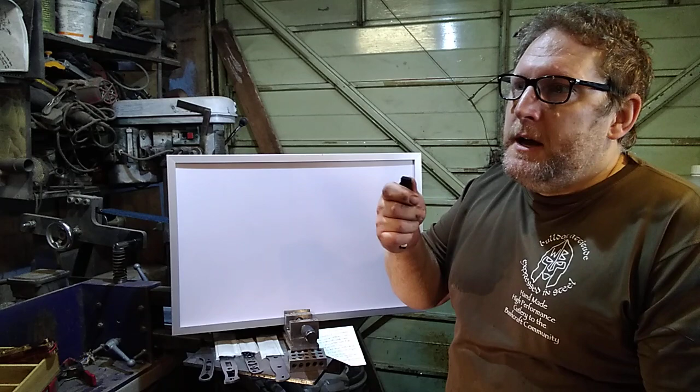So what I thought I'd do is address what the adversarial comments were with this one person, but also to share with you why I do one certain section of a knife making build the way I do it, okay, based on, I was in engineering-ish, and I was in manufacturing-ish, and I was in education-ish for about 25 years.

Nearly 50 now. So things I've picked up along the way. I'm not Isambard Kingdom Brunel, I'm not Dyson, I'm not Elon Musk, okay, but I've picked up things along the way and thought, I like that, I won't be doing it that way because that had problems, and gradually from talking to people and sharing, you end up with.

But what I don't do, if I can help it, is come up with some adversarial challenge in order to drag out of someone the holy grail of information that apparently I'm lacking in, which is what this comment was.

So the comments were, one person was, why do you drill so many holes? This is in the handle, drilling holes. I don't understand the chamfering. When it's covered with epoxy and scales, anyway, ABS

mastersmiths rarely, if ever, do any of these wacky things. Why drill all the holes? If the best knife makers do not do these things, why do you?

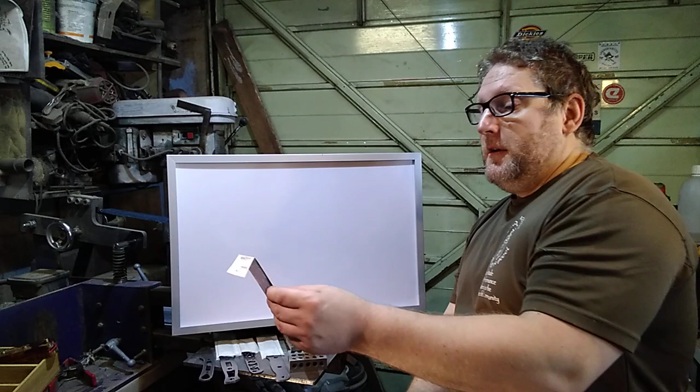This is what I know. So, why do you drill so many holes?

You could make a knife using only the holes that are meant for pins.

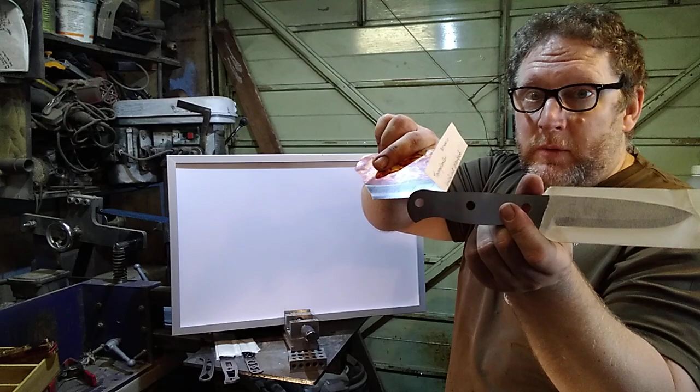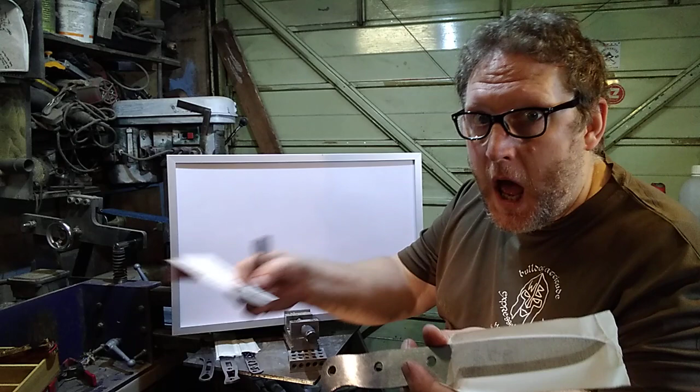So, being that there's stock removed on the blade, and being that there's probably more steel there because you haven't removed that area and you haven't removed all of that steel, you only took a few little scoops out there, plus added the weight of the pins, plus added the weight of the liners, plus added the weight of the scales, plus added the weight of the epoxy, okay, it could be handle heavy.

I'm 17.5 stone, probably wouldn't make much difference to me. I don't carve for hours on end, so it probably wouldn't make much difference to me. Having a blade-heavy handle with this model, and if you're going to baton it through wood anyway, it means you want it handle-down as you're taking it. There's so many reasons it doesn't make any difference.

My knife design for that one is like that. Why? Because it's simple. But why would you want to drill so many holes?

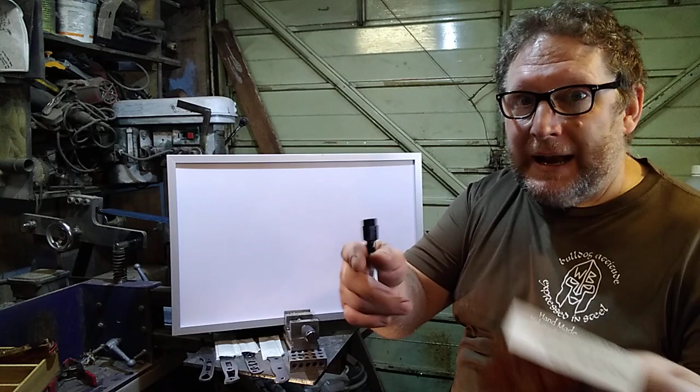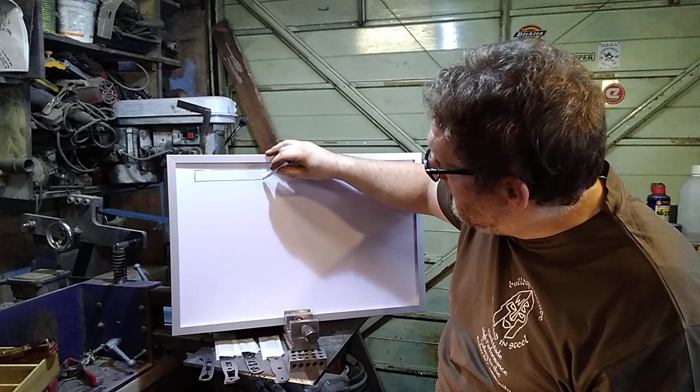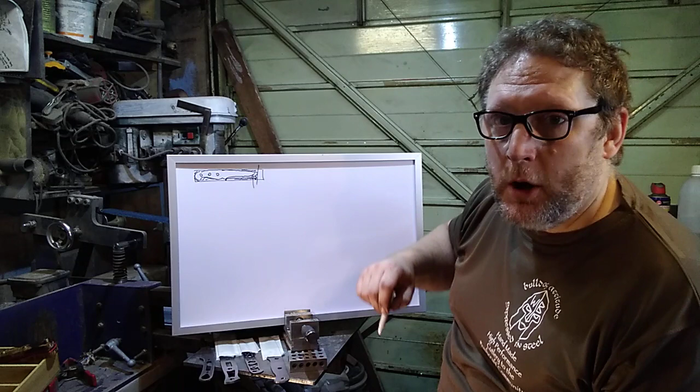So, balance. If you had a piece of steel like that, and you've made your Woodlore shape like that, and it gradually goes down to there, and your Woodlore comes up and does that as your Woodlore - okay, in terms of, you've took all of that steel out there, you've removed half of the steel on the bevel. By the time you've took all this out as well, and then done your 3 holes - oops, sorry - it's not a Woodlore clone, because a Woodlore clone does that.

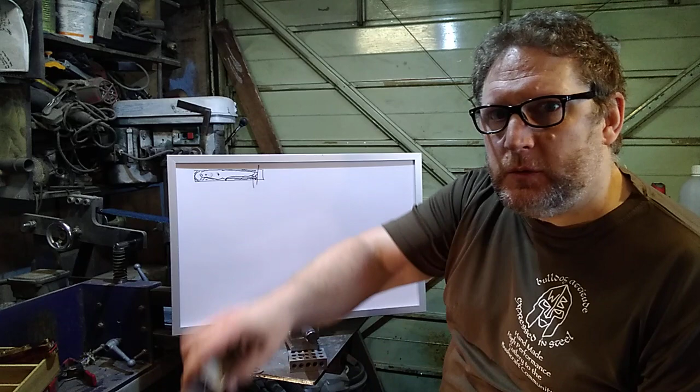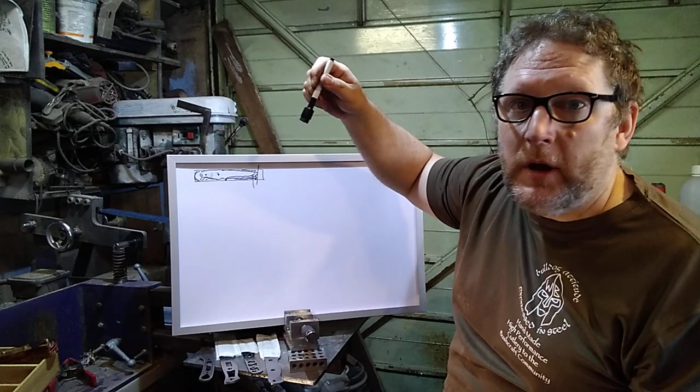See how my design is not a Woodlore already. My choice was to have them equidistant from scale at one end, center, pommel section. A Woodlore has a Corby pin there, ish, or a Loveless bolt at the other end, and then closer to the rear, a Loveless or Corby would be a lanyard tube. I don't make them like that. I've come away from that design. That's why I've done it the way I've done it.

So, why do you drill so many holes? Maybe that's the way he wants to do it. Balance, initially. So he's done all that, and then you add on the handle. There's a possibility that the handle could in fact shift the balance point to maybe there. So what could happen is they drill a hole there and a hole there, just to remove a little bit of steel, a little bit of weight, just to eke back the balance point and push it a little bit that way.

How about that? How about a knife maker made a choice to drill a few holes? Okay. Why additional holes? Why so many holes? If you had a handle - I'm looking at a plan view, okay?

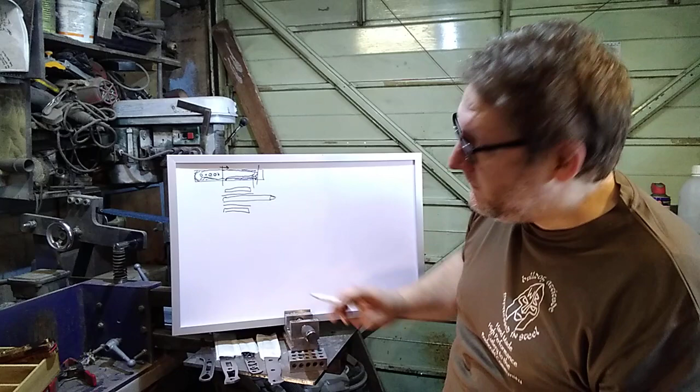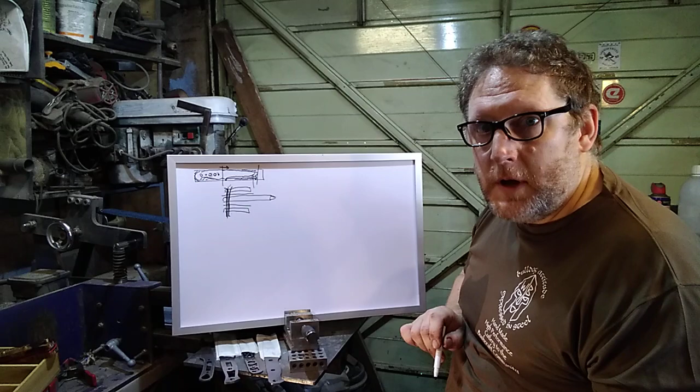There's the blade from above. You will put on a liner, scales, a liner, and scales. All that's connecting him to him is a pin or lanyard tube with the glue either side of the lanyard tube. If you had a hole here, the glue would also be from there down inside the hole and alongside underneath there, connecting this side through the handle, bracing and connecting that to the other side. It's called through-gluing.

There's 2 reasons. So I'm using the epoxy to actually connect one side to the other with more adhesion than solely the epoxy on the outside of a lanyard tube, a Loveless bolt, or a Corby, or a Loveless bolt and a Corby. So this is more connected to that. It's more together - there's glue all the way through.

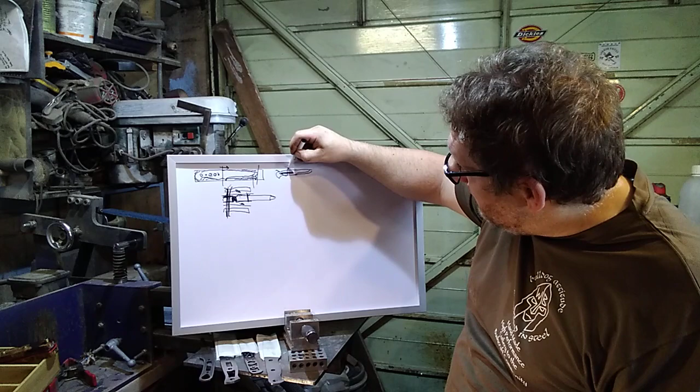The other thing you can do is on your handle - obviously I'm drawing this all backwards - there's your Woody McWoody. You can go on an idler wheel and you can scallop out a sort of half-moon section on both sides. Not much, just enough. And that allows the glue to join this hole to that hole, through that hole, through this to that hole, through that to that hole. It's even more connected, and you've got a well of glue that can go together when you squash it together with clamps. You're not squashing all the glue out - you're actually making use of the glue you've put in there, as opposed to getting it squeezed out. You're actually going to make use of it.

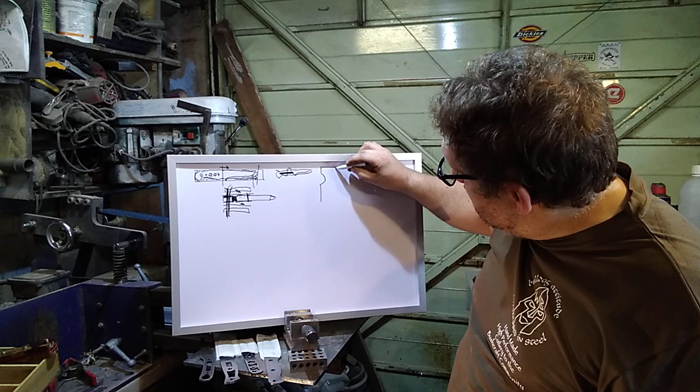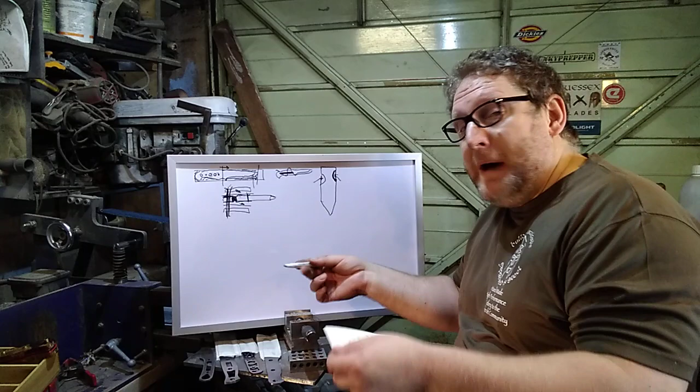And epoxy is generally lighter than steel, so you've reduced weight. So your section of your blade now looks like this, and you've gained the loss of weight. You've took out steel and you've put epoxy in the handle, so you get an aid in balance. So why do you drill so many holes? Balance, through-gluing. You could also do a fuller effect within the handle for more through-gluing. Okay.

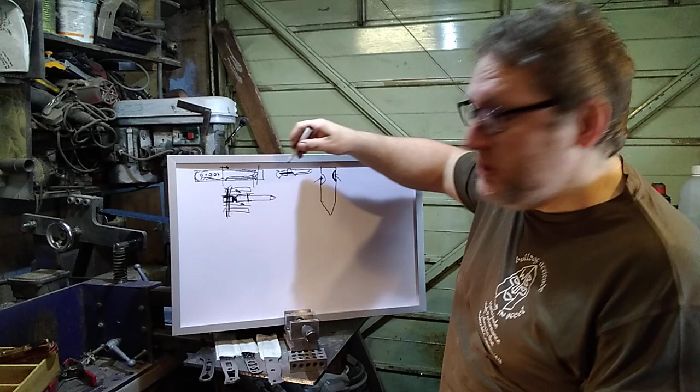Master bladesmiths rarely, if ever, do any of this whacking. Generally speaking, a lot of master bladesmiths do stick tangs for balance. They're that good, and I bow to their general superiority. A lot of the time their blades are that good. Okay, they'll make them like that, and they'll put one pin there - it won't be as big as that - they'll put one pin there.

If a master bladesmith wants to do that, he can carry on. I'm a knife maker, I don't deal in stick tangs. There's a lot of things where I'll use a full tang for strength, whereas a master bladesmith has got it way down. His removal of material for the handle, if he puts a guard on, a bolster, however he pins the end over, or whatever pommel he puts on, is going to be top quality. A master bladesmith could do that.

But if he's forging it, he's not going to forge a full tang and then grind that down, he's going to forge it like that. If you're going to do stock removal, you wouldn't stock remove that shape. You want to remove the least amount possible. Who stock removes a knife of that profile? If you're going to stock remove, you'll do something where you only remove a little bit at a time. We wouldn't generally make it like that in stock removal. That's a forging blade profile, because you're using as much steel as possible, getting as much blade as you can, while retaining a fair amount of steel within the handle for strength and rigidity.

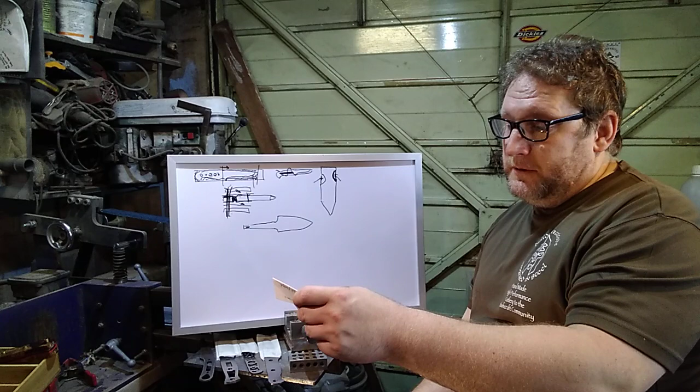What he's forgotten to ask is, you've drilled all the holes, right? And then why the chamfering? Well, first of all, he didn't ask, why didn't you ream it? So you drill a hole, okay, what you'll have is probably a slight amount of scoring in it. Now if you ream the hole out, you'll finish the hole ever so slightly better.

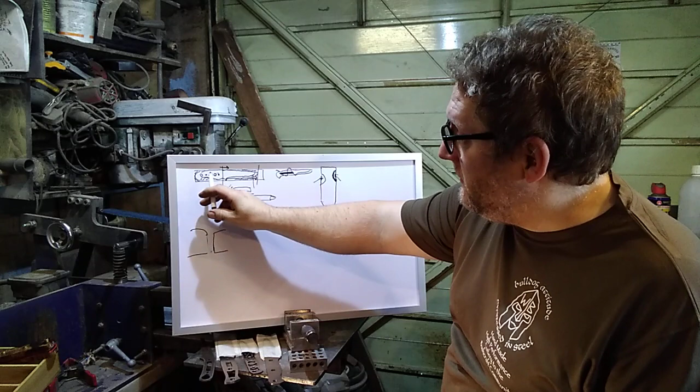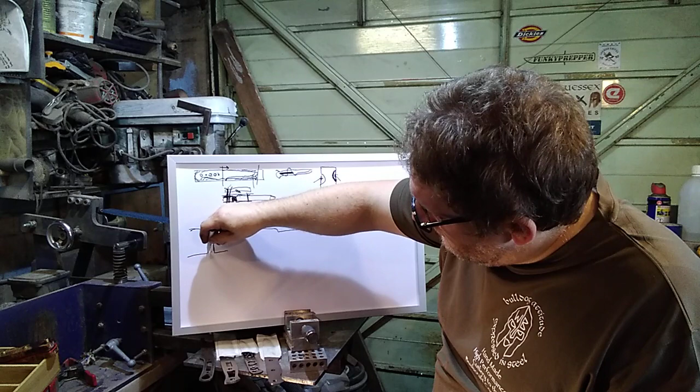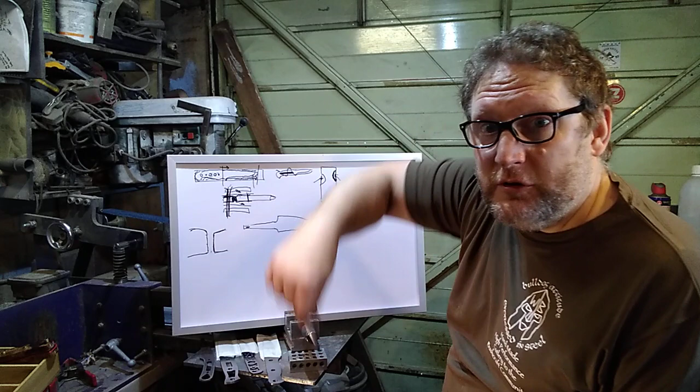What we're trying to get on our holes, blade edges, handle edges, is a smooth finish, devoid of pits, cracks, or sharp corners. So if you've drilled the hole really, really well, you're probably not going to have a reason to ream it. But if you've blasted through and your drill bit's a bit nasty, occasionally you'll get score marks in it. So to ream the hole, or just dress it out with a Dremel or something, just a little bit, will tidy up the hole away from what the drill bit's start at the beginning, and the flute as it's gone down through, doesn't always leave the most perfect finish.

It's not really the end of the world if you've done it, but what we're trying to do is get a job better than if we hadn't considered it - the balance, the weight, and all the rest of it. What we're talking about now is pits, scratches, or sharp corners. We don't want something called stress propagators - the chance of all the stresses and strains within a knife being used physically having somewhere to start at. It's called a riser, that's the word, a riser.

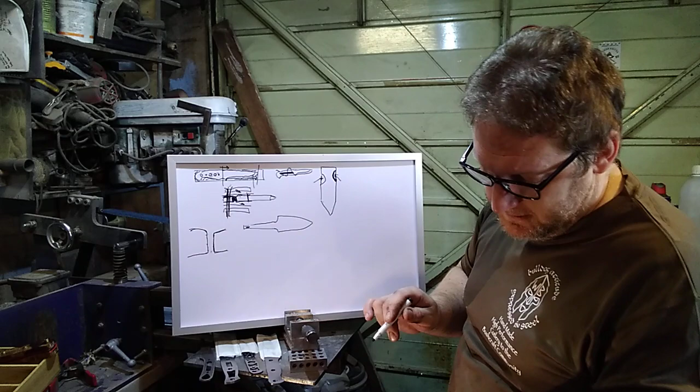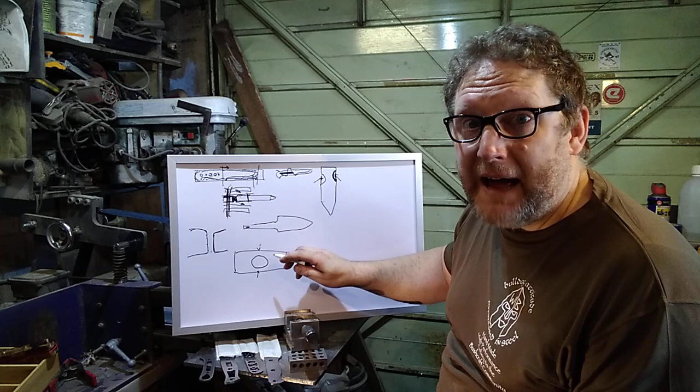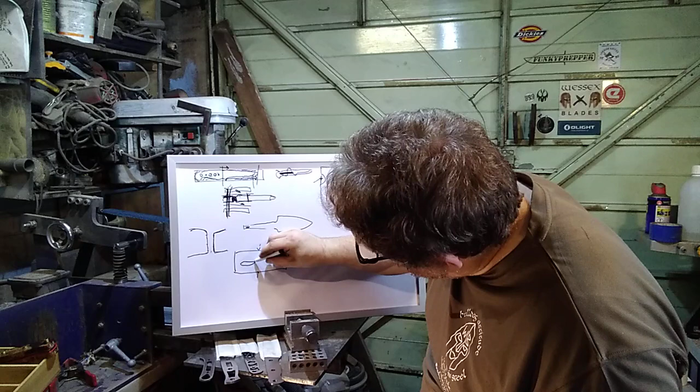So you've got a piece of steel like that. Now let's say it's going to be a pry bar and you're going to design it. You wouldn't put a thumping great hole in it like that, because you've got thinner sections there - does that make sense? A pry bar's use would be daft if you've got huge holes there. What would be better, for the same amount of steel lost, would be to add something more of an ellipse than a point. So you've still removed a fair amount of material, but you haven't got sharp corners.

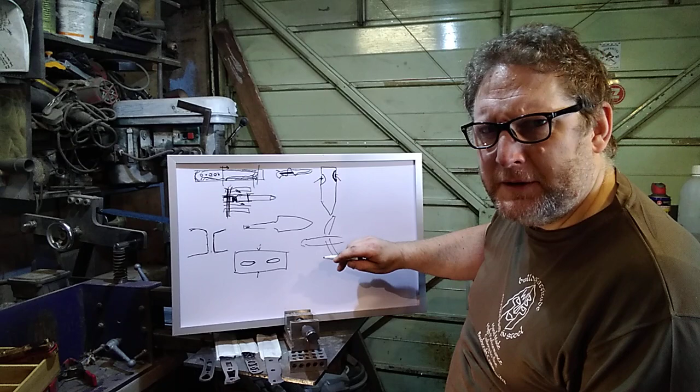There was an airplane that was made, called the de Havilland Comet. The design of the Comet looks very much like a normal sort of plane you get now - very much like most planes are made now.

Very, very similar. However, when you had a look at the windows, in 1949, the windows were really square. And with all the stresses and strains of flying aircraft, it turned out these corners weren't the best thing for it. So now you look at aircraft windows and they're more rounded.

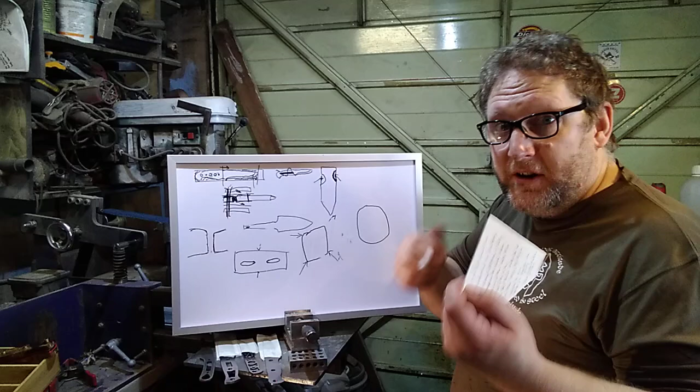Those theories, that idea, is what we're trying to get into knife making if we can consider it. So what we try to get away from is having a sharp corner - pits, chips, areas of cracks, anything like that. You can see how when I drew this one here, I've drawn a rounded section there. He hasn't made it like that - well, it's just, I like having it like that.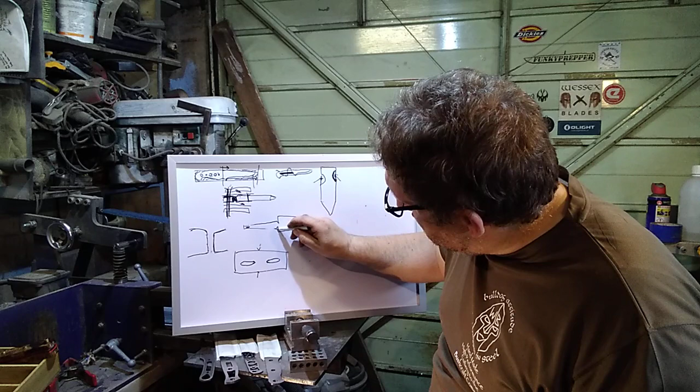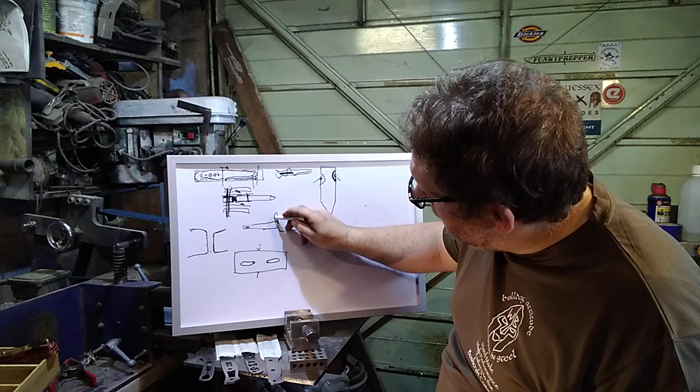I like having that area because when I glue my softwood guard on, I've got more area for the glue. It just wouldn't happen otherwise - softwood guard, cross grain, you know? It just wouldn't happen.

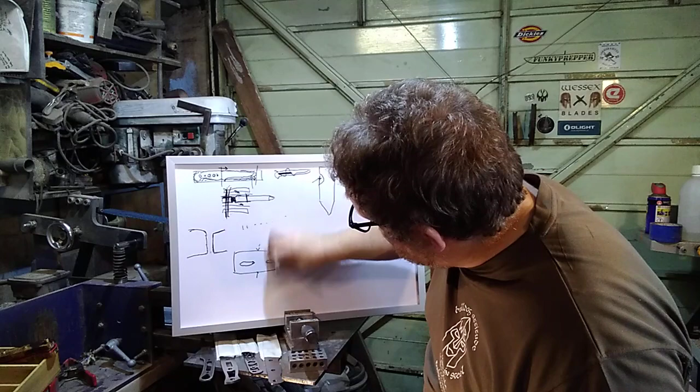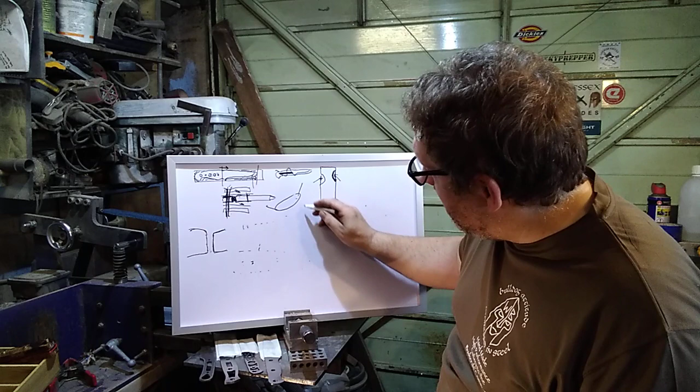So you do a hole, and if it had drill bit marks in it, you'd ream the drill bit marks out. Then, just in case you've got ever such a slight burr, you'd chamfer it. So your 45-degree tool will come in like that and just gently chamfer that off. Now you wouldn't chamfer it a ridiculous amount.

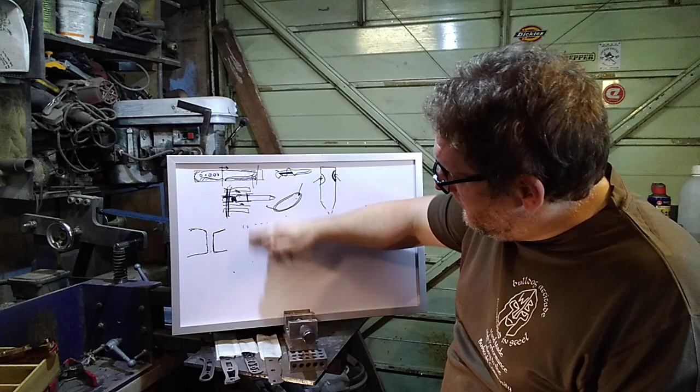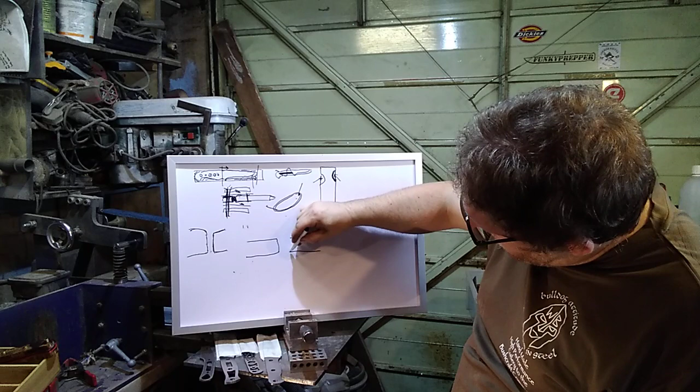So now we're looking at it side on - there's the steel. You would only chamfer just the littlest amount. You wouldn't chamfer it a large amount because you want the rigidity for the pin to go through, so that all this contact area here would stop the pin from moving. That makes sense - so you would chamfer it only a little.

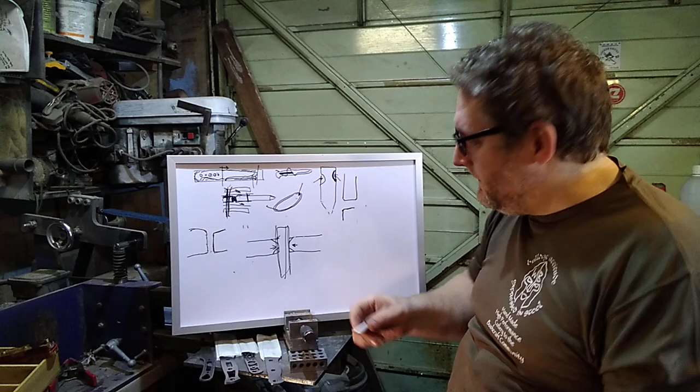So why the chamfering? It just takes that nasty sharp corner off just ever so slightly, and that'll aid initially the pin. I actually chamfer the ends of my pins as well, so when you're gluing, the pin can rattle into the hole a lot happier. Plus you don't pump all the glue out of the hole because you've got a really square faced pin and a really square faced hole. By chamfering the hole and the pin, there's more chance that less glue comes out when you push the pins in from either direction. Does that make sense? Why chamfer? Takes the corners off, less glue push out.

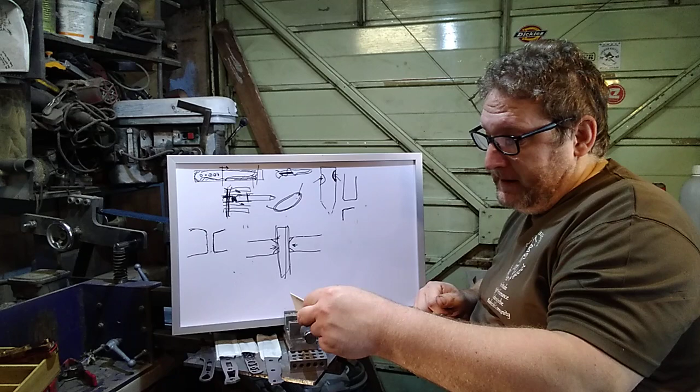Happy days, you could have googled all of this. And where's the last one? Why drill all the holes? The volume of holes is basically for balance, but you don't necessarily need to drill holes.

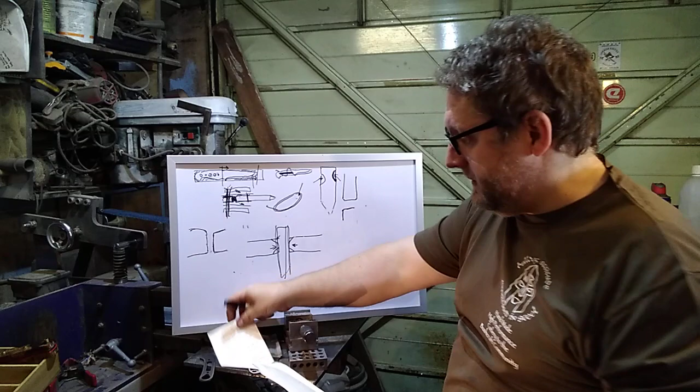My blades are lasered out, and then what I have to do after it's lasered is Dremel all the way through here so that the start point of the laser's initial blast, when it comes round and meets up with it, you end up with a little spike. I don't want that spike there, so I've Dremeled it all off neat and tidy. Plus, from the heat treat, I've took all the decarburized areas off, so all of that is Dremeled - it's all shiny inside and rounded corners, so I ain't got any starts.

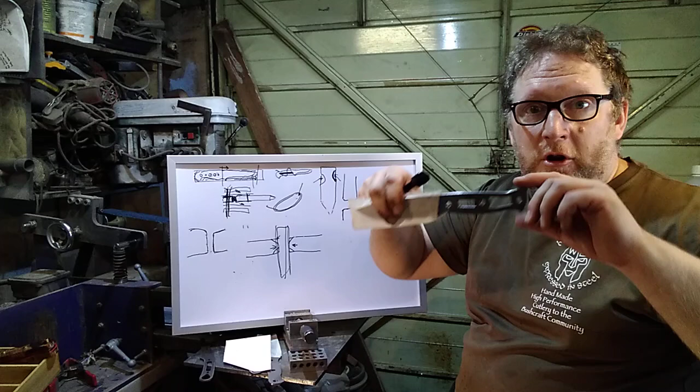And then what I'll do is just before I'm doing the gluing, I'll go onto the top roller and I'll just gently do this fuller's way sort of section across there just to connect everything up together again.

So why did I take all that out here again? Balance. I've took weight out, but I haven't given myself square edges - I've not cut squares out, I've cut rounded things off, and even then I'll skim around the inside of the thing anyway with a Dremel, just taking any sharp edges or nicks or burrs or whatever, sorting it all out there.

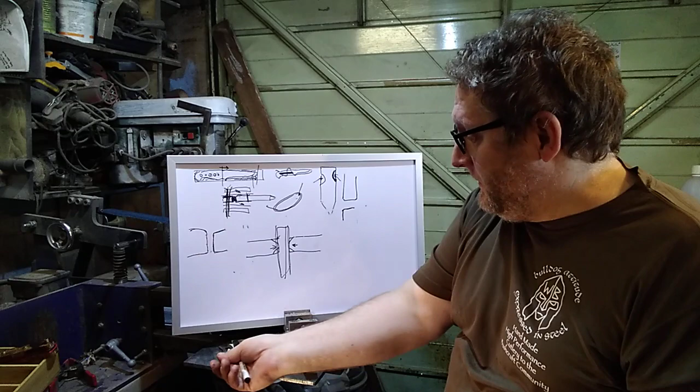It's good fun, isn't it? Anyway, one little thing about general knife making and making loads of holes.

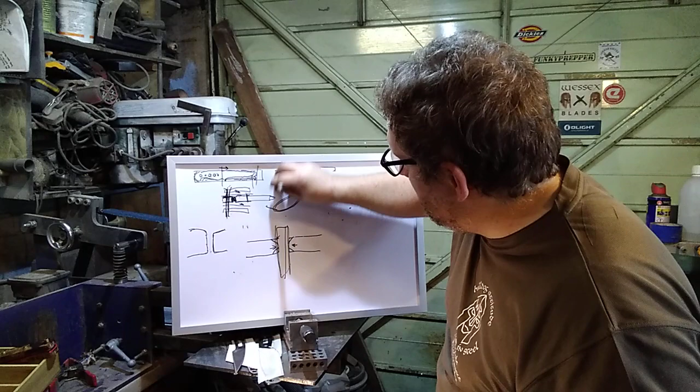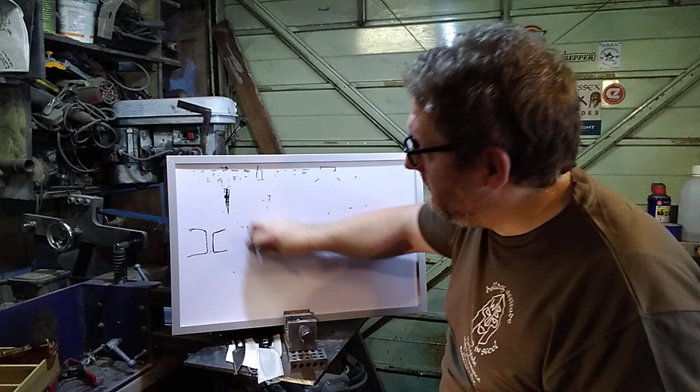One thing again he never mentioned is reaming, and he never mentioned the gap between holes and the stock thickness. This is something I mention occasionally when someone's done a lot of holes on a knife handle. So here's...

Let's say it goes round to there - there's a knife handle. Okay, someone's done a really chunky knife handle, you would have a lanyard hole, something like that. Okay, cool, yeah, like it - big thick lanyard. And then they drill for lightness.

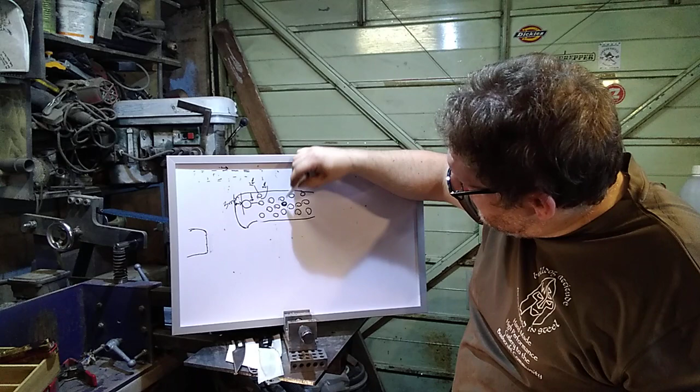And they start putting random holes in, like that. So what they've got is a gap from there to there, and let's say that's 3mm from here to here, and they've got a gap there of 4mm, but they got a gap here of 2mm. They got a gap there of 1.5mm, they got a gap there of 1mm between one hole and another, and this one is 0.5 millimeter from the outside.

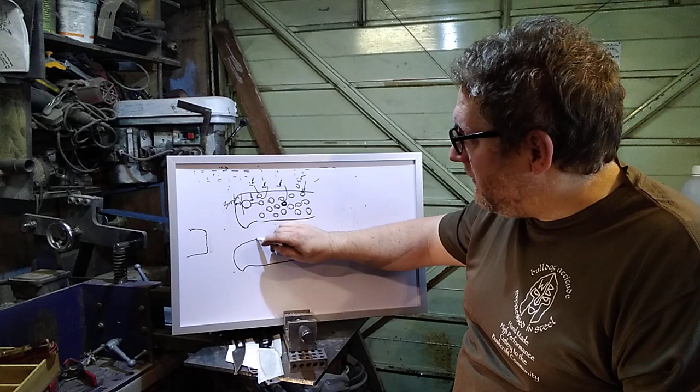Okay, what you don't want to do is randomly drill holes. What I would say is, in your knife handle, if you're going to be drilling holes, get yourself a kydex pattern or a G10 pattern for whatever that knife handle is, and rationalize, think about, consider the thickness of the stock of the steel that you've got. So if your steel stock is 4mm, try not to have a gap of less than 4mm between your holes, just as an idea.

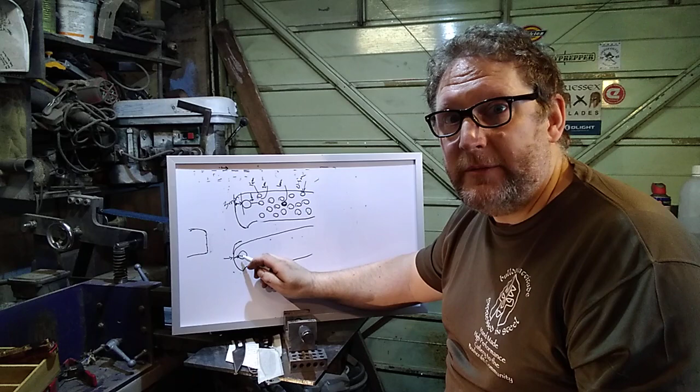So there's that there - you got a 4mm stock, and you got 4mm from the edge of that hole to there. So that isn't any weaker in terms of section that way than it is the thickness of it, 4mm, because that means you've bought 4mm steel, but you've left 3mm from your pommel end to your lanyard tube. So you've actually - well, why didn't you have 3mm steel? Because you've already made that thinner.

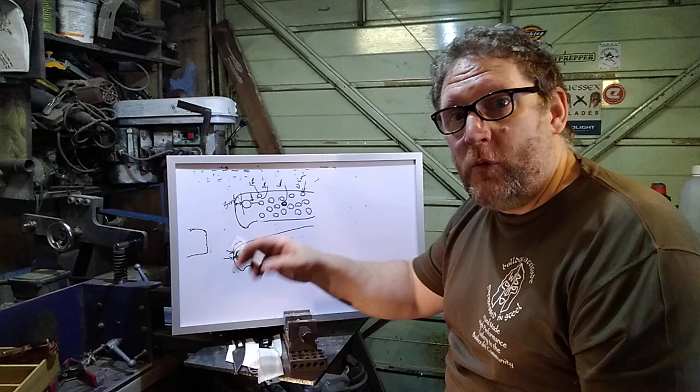It's just odd to me. But at least he didn't put a ruddy great thing like that and make it 1.5mm to the end of the steel. Granted, it's at the end, but why not have as thick a material in terms of your stock as the gap you have between one hole and the edge of the blade, or one hole and another hole?

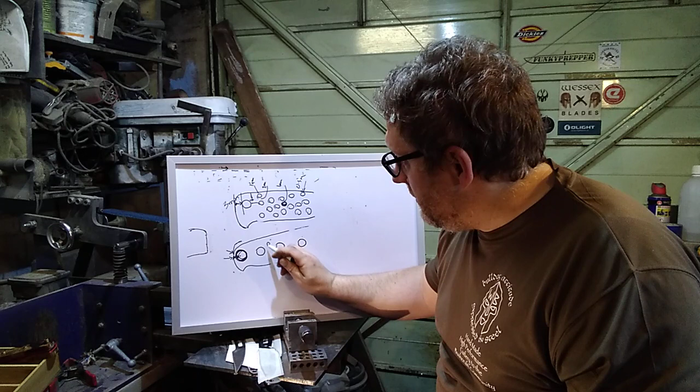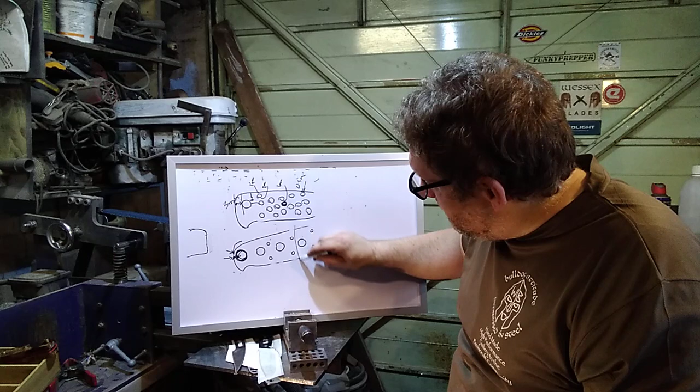Let's say you want to do loads of holes to save weight. You could do three 8mm holes - that's a pin, that's a pin, that's a through glue-in - and you could put some 4mm holes there, allowing you to put a bolster on for two 4mm holes. That being 8mm, and then your back half scale has got your 4mm.

You could pin that - your 4mm, an 8mm, and a lanyard. See how all that is braced, and you've not got much difference between what your thickness of your stock is and the gap between, so you haven't compromised it.

If you end up putting a 4mm hole, but you've only got 2mm gap, you've left yourself hardly any scope for when you're cleaning your handle up afterwards. It's only ever going to get smaller. So that 2mm gap will end up as 1.5mm, and 1.5mm is - well, why bother putting it in 4mm stock if you've just ground it down to next to nothing? And bear in mind, that's a brass pin maybe.

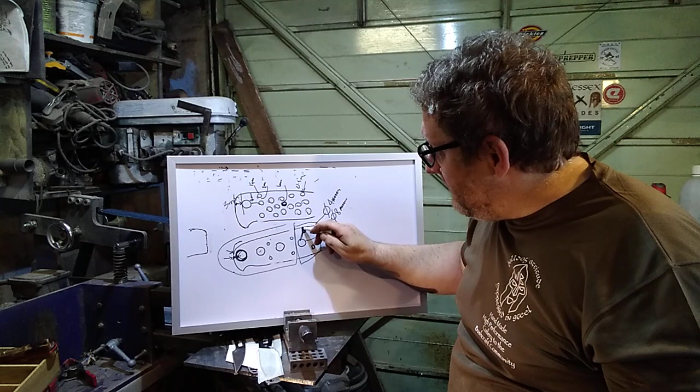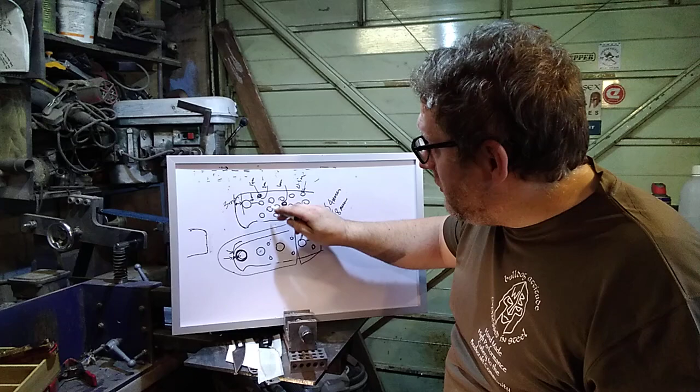That steel on top has got to cope with any stresses and strains. Try and rationalize, try and think about the gaps between where you're doing your holes, and don't shoot yourself in the foot by having something too close to the edge or two holes too close together, so you've got more gap than you have actual steel, if that makes sense. So anyway, that's just my rambling, without trying to upset anybody.

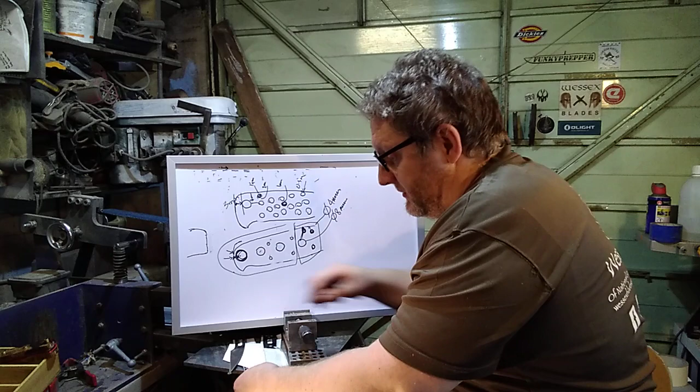But yeah, just ideas. Why I make my handles the way I do is - I've not done my pins exactly like a Woodlore, because I don't want to do it exactly like a Woodlore. I don't use steel exactly like a Woodlore. My heat treats are not exactly like a Woodlore. I use ball bearing steel, not O1.

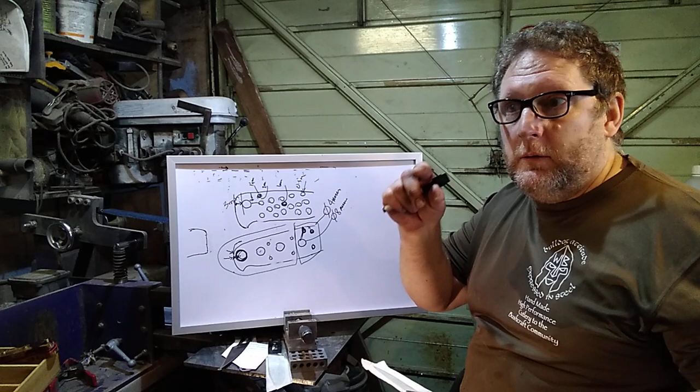My pins are equidistant, not one at one end, one at the other end, with the lanyard pin very close to that. My 52100 has a partial bainite heat treat. I don't do everything bog standard exactly like everybody else would do it. I think, well, that's a good idea, I'll do that instead.

Nothing wrong with O1 steel. Nothing wrong with not doing a partial bainite. I just think, do you know what, I'm going to do it like this.

So the next thing would be, why do I take those sections out there? Well, I've considered it, and the steel has got a sort of vacant void in it, but it's not any thinner anywhere along there than it is elsewhere. It's not cutting jagged - it's smooth with rounded corners.

We've even rationalized where it goes around the center pin, see how it keeps with the shape. It's still pretty strong, but I've got 5-6 mil there on a 4.7 mil blank, so I haven't gone to 3 millimeters close to the edge on a 4.7 millimeter thing.

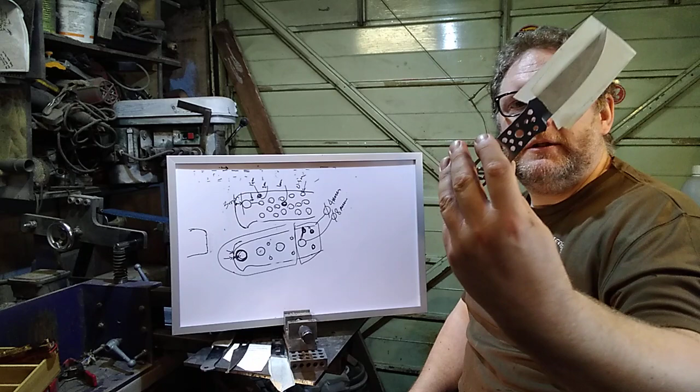He's removed steel, but he hasn't randomly got holes drilled. Just my thoughts - so I hope that helps.